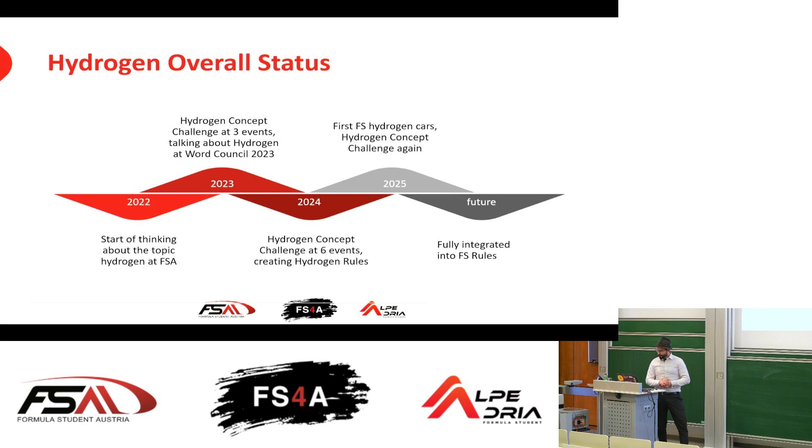Hydrogen is now the new cool stuff in Formula Student. It has been launched in 2022, and already in 2023 we had a Hydrogen Concept Challenge in 3 events, which has expanded to 6 events in 2024. And now for the 2025 season we're going to have, hopefully, the first actual hydrogen cars on track, and also there will be, again, a concept challenge.

Why are we going to do that? We want to propose alternative technologies because we think that, generally speaking, hydrogen will be an important topic in the future, not necessarily related to mobility. We don't think hydrogen will be the biggest issue in cars, but we think that promoting hydrogen to students and new engineers is a good idea for our future. We also want to give you the possibility to build green vehicles without having to deal with the high voltage system, because some teams and universities have trouble with that. So you can go zero emission without the need for high voltage batteries. And we want to encourage students to acquire knowledge in hydrogen.

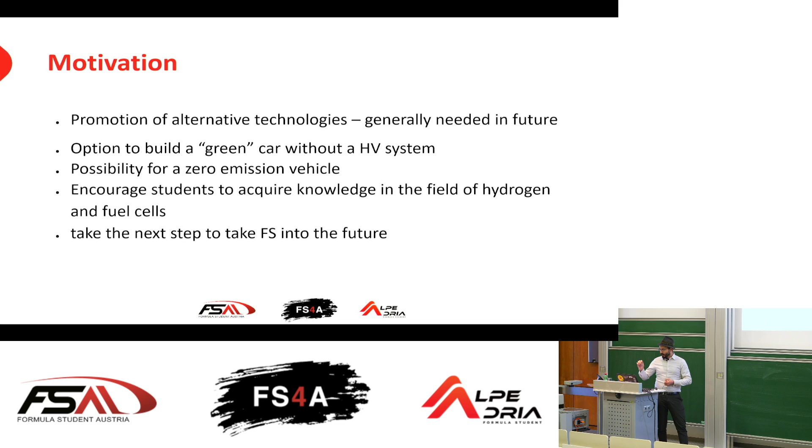We're not alone with this. There are other motorsport events which are dealing with hydrogen fuel cell and also hydrogen combustion prototypes. So we think this can generally be an exciting topic for the future of motorsports.

As I said, we will again have the Hydrogen Concept Challenge. So if right now you are not yet ready to make a switch to an actual hydrogen-powered vehicle, you can participate in a concept challenge. It will be basically a special award with prize money, at least for FS Austria. It will also be available at other events - you can see here at the bottom we have FS Austria, FS East, Croatia, Alpe-Adria, Portugal, France, and also the second event in Germany, Formula Future.

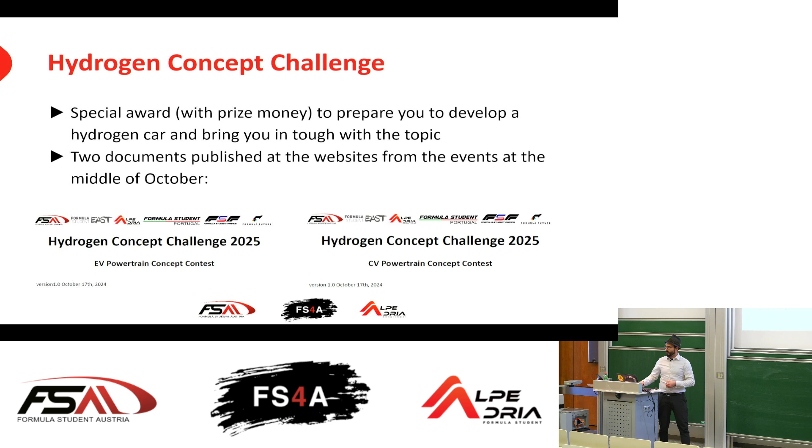So as I said, in 2024 there have already been 6 events which offer the concept challenge, and in the future it will at least be 6 events as well.

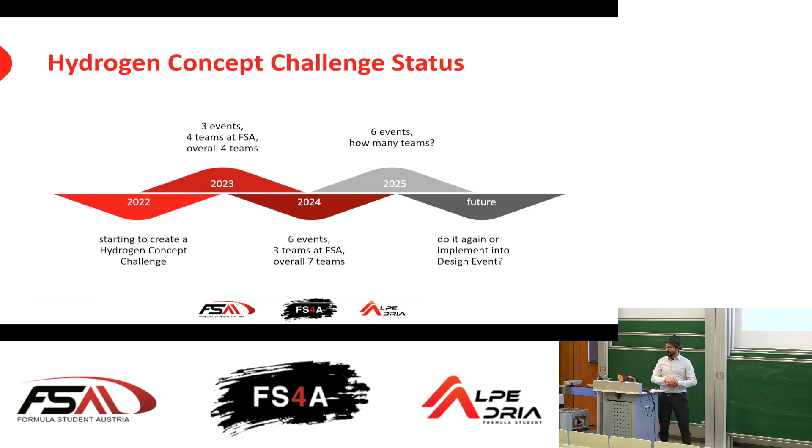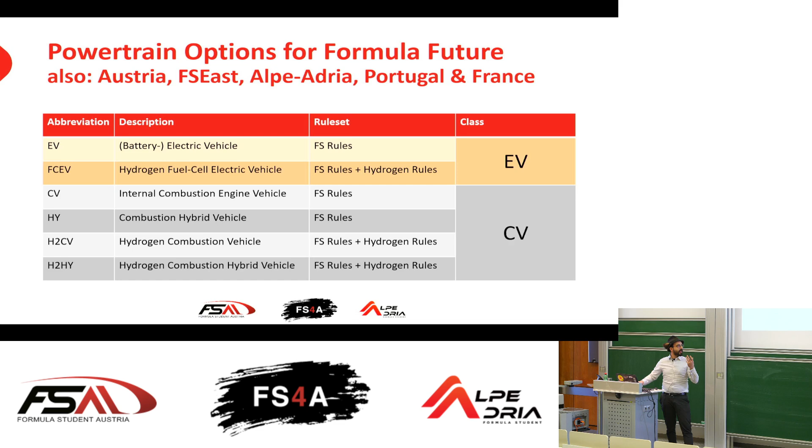What does this mean now for the rule set? We don't have 2 vehicle types anymore. We have now a total of 6 vehicle types, because if you count it together with all the possibilities of hybrids that we allow, you basically can have 2 different kinds of electric vehicle - one battery electric and one hydrogen fuel cell. And for combustion vehicles you have a total of 4 options: with traditional fuel, with traditional fuel and hybrid, and with hydrogen as a fuel with or without hybrid. Those 6 classes in total will be competing in the 2 standard classes that we know already. So the idea is to implement hydrogen as a new option within the existing classes.

I want to give a short overview of what is happening with hydrogen as a fuel. The title says it already: it's not more dangerous than petrol or batteries, it's just different. Hydrogen itself is not an explosive, because an explosive material has the oxygen within itself. Hydrogen doesn't have that, it just burns really, really well. It is the least dense gas there is, so it's 14 times lighter than air.

What that means is, if you're working or dealing with hydrogen outside, it's very low risk because any time there is a leak, it just goes straight into the air and dissipates very quickly. It also means it's almost impossible to light anything on fire in the outside air because it will be diluted very fast. If it catches fire, the flame is almost invisible, so that of course is a risk.

You may know that from methanol fires, which have the same issue. If you have like nitromethane, the dragster fuel, if that is on fire - if any driver has it on their driver's seat and he is on fire - it will look completely crazy because nobody sees the flame actually. That is a problem, but the jet of flame will go straight up into the air, and if you make sure your system is all behind the driver, the jet of flame just goes straight up, then the driver is not actually at risk.

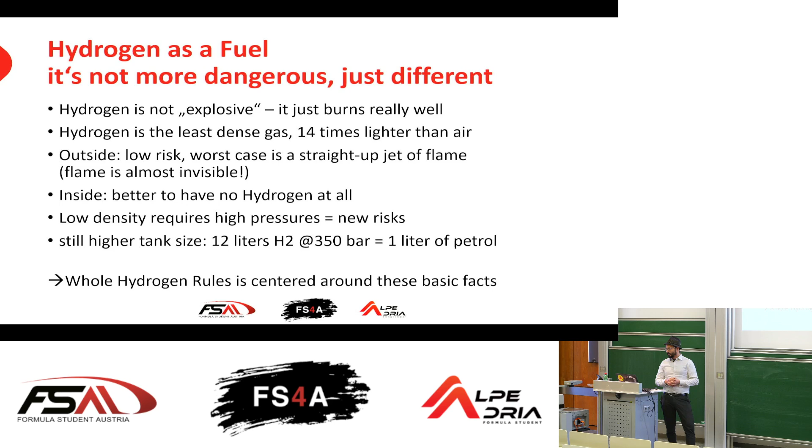Also, the low density of hydrogen requires high pressures. If you have about 12 liters of hydrogen at 350 bars, which has been set as the maximum pressure limit for Formula Student at this point, it is equivalent to about 1 liter of petrol. So you will need about 40 liters of pressure tank bottle for a combustion car, and it will be about the same size for a fuel cell electric vehicle. So that is a lot of extra volume in your car.

How does hydrogen work for combustion vehicles? The basic engine concept is the same, so you can basically fuel a petrol engine also with hydrogen. You can use port fuel injection. Direct injection is not really that suitable yet for hydrogen.

The biggest difference is that hydrogen burns really, really fast. If you're using the same lambda values as with petrol, so a stoichiometric value, then it burns 10 times faster than petrol. This would normally be called knocking in a petrol engine. So in order to deal with that, you have to dilute the hydrogen with lots of air. You need at least a lambda value of 2 or more to get it under control.

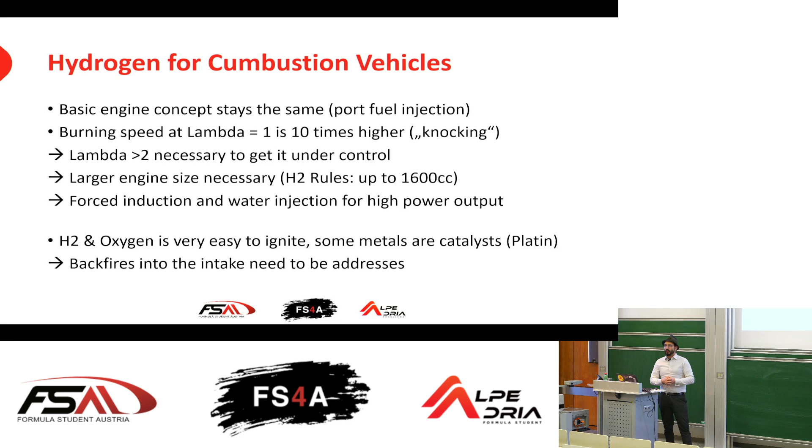In order to make it possible to have the same power, more or less, we are going to allow up to 1.6 liters or 1600 cc's of engine size. Most likely you will need forced induction coupled with water injection to get it under control, because it just burns differently. Also, hydrogen and oxygen are very easy to ignite, so the ignition system doesn't need a lot of energy anymore, but this also means it could ignite when it shouldn't really. So backfires into the intake system are really an issue and need to be addressed.

For hydrogen fuel cell electric vehicles, we are currently working with a limit of 2 kilograms of hydrogen, but this is going to be up for debate. We're going to have a whole different session just dedicated to hydrogen at the very end of this event. In order to compensate for the additional weight of the fuel cell, we are going to allow up to 100 kilowatts of tractive system power instead of the 80 kilowatts it is today. The only thing which we are stipulating is that at least 50% of the electric energy for the endurance has to come from the fuel cell.

So basically a small battery, and you can drive your acceleration, skid pad and also autocross event with that battery. Just for the endurance, we're actually forcing you to use the fuel cell. That is the current plan in order to get it started.

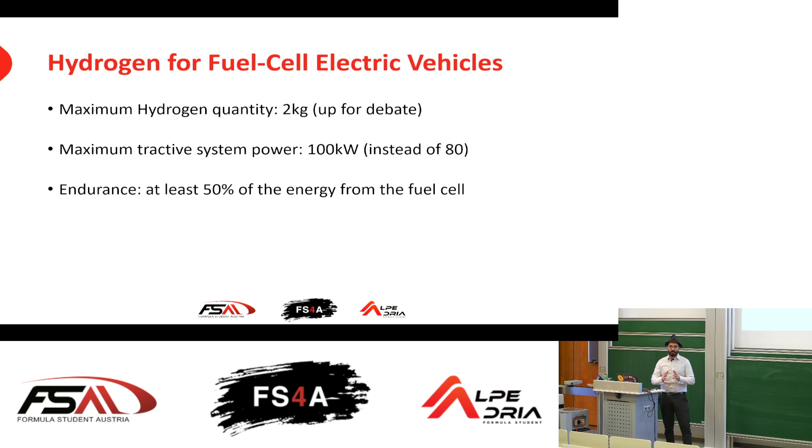And now at the end of the hydrogen safety part, similar to the requirements for electrical cars, so similar to the ESO requirement, we're going to have the hybrid safety officer. My colleague is just right now publishing the Slido note for that. So we are going to offer a course to participate and get trained as a hydrogen safety officer, sorry about that. So this is about hydrogen safety officer training.

We're going to have a training on the 22nd of February in Karlsruhe. It will be about 100 euros per person. And you can use the link now, which is in Slido, to show that you are interested in that, so that we can finalize the organization for it.

And now I would like to transition to the main course. So hydrogen is over for now, and I would like to get started with the rules. I'm one of the persons responsible for the FS rules. I'm personally responsible for the combustion vehicle chapter of it. And I'm also, of course, in close contact with anything regarding the technical specifications.

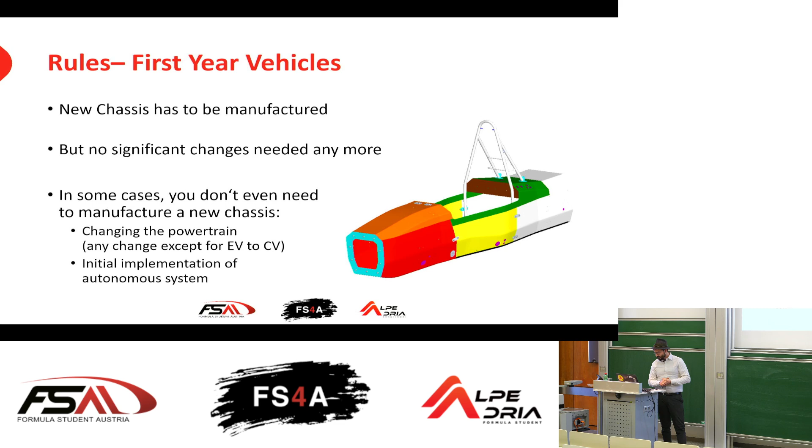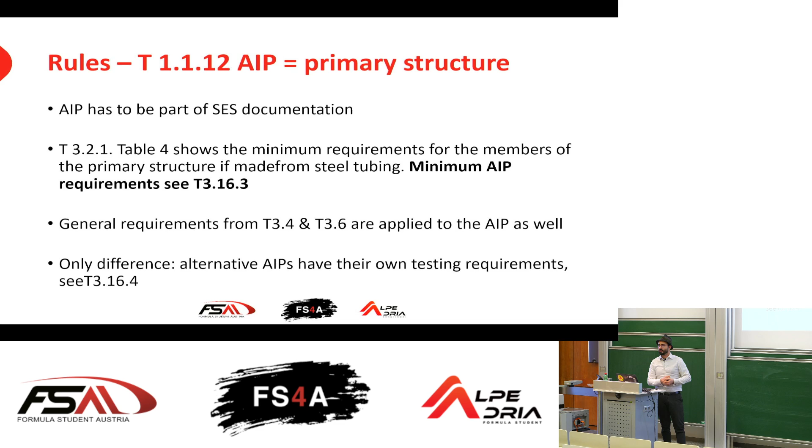It is also an exception for the implementation of the autonomous system. We have made a small tweak in the definition of what is the primary structure. The anti-intrusion plate, AIP, is now also part of the primary structure. It's basically a very small change. You still have to test your anti-intrusion plate according to the very specific rules now in T3.16. It's just to make clear that the other rules, 3.4 and 3.6, are going to be applied to the anti-intrusion plate as well, which according to the old rules technically was not the case. In reality, it already has been, so this rule change shouldn't really make a difference for you. It's just formality, to be honest.

Rule T2.1.1, good engineering practice. This is something I want to emphasize: it is not possible to write down everything in the rules. This is a very short rule - you have to design and manufacture your car according to good engineering practice. Yeah, okay, nice and all, but what does that mean?

It means you will not pass the technical inspection at FS Austria. For example, if your primary structure, your chassis, has very bad manufacturing quality, if everything starts delaminating, for example in the monocoque, we just won't let you through. If you have excessive flex or just a bad load path design in safety critical components like your suspension or your steering system, we consider this to be bad engineering practice, and it won't be allowed.

The typical example is that you have a steering system where the front wheels are being held in place, and you turn the steering wheel and you can flex it this much and nothing happens at the wheels. This is just a bad engineering design. Similar problems can occur with the brake pedal or just generally with anything related to safety.

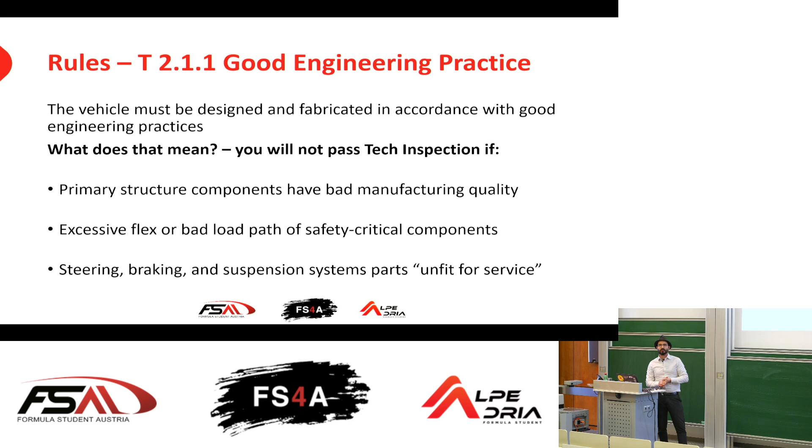A new rule change made as a consequence of issues seen this year is rule T2.6.4. This is one of the rules currently being updated with the FS rules version 1.1 update, which should be published in a few days, hopefully. The new updated version of this rule will say you need to have a 5mm minimum clearance in the radial direction between the rim and any other static part in your suspension - typically this is your upright and your brake caliper. The reason we are forced to make this rule is that many teams don't have enough clearance, and when the car is moving, the whole assembly will flex, leading to problems like seen here.

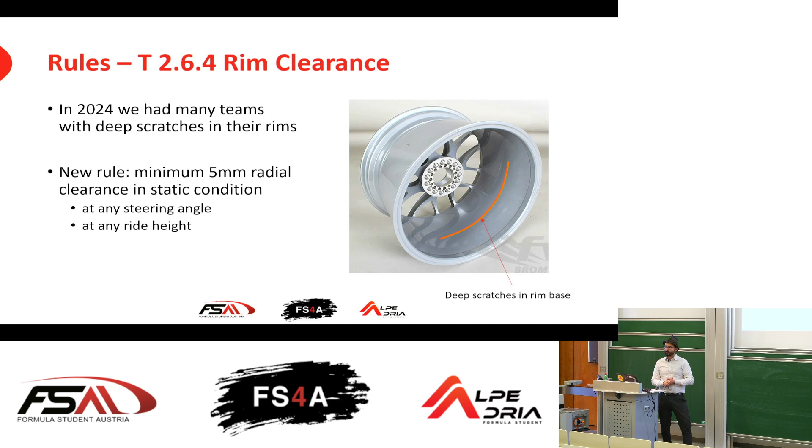This is actually a carbon fiber rim. You can see here on the right, it flexed excessively and touched the brake caliper until it was so thin that the rim actually broke, as you can see here on the left. But it's not limited to carbon fiber rims - we have definitely seen a lot of aluminium rims as well, which had very deep scratches, and we had to confiscate those rims. They were not allowed to participate with these rims anymore.

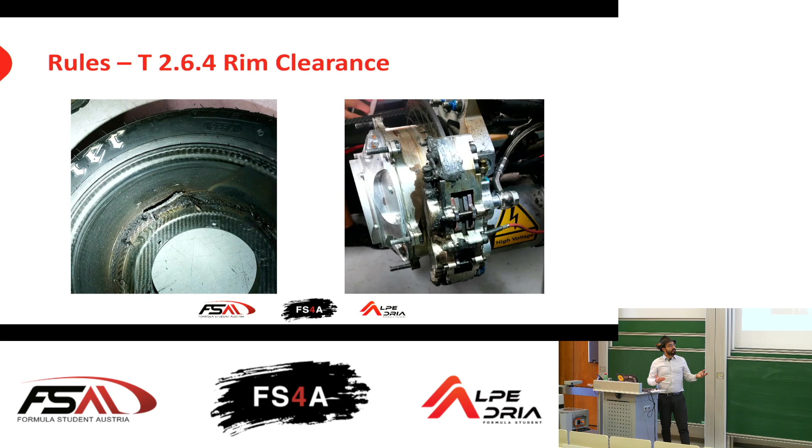But of course, this is one of the things which we understand to be bad engineering practice if you do not have enough clearance, and this is just one very specific example where now there is a rule for it. There are thousands of other examples where we consider it to be bad engineering practice, but we cannot put it all into the rules specifically. So this is why we have an overall rule to ban bad engineering practice. I hope you understand.

General new rules with regards to the chassis. Just reiterating, most of this has already been covered by my colleagues from Germany as well. If you have steel with a low yield strength below 305 megapascals, you might need to increase the wall thickness of your tubes in the future because of the way it is now calculated in the SES. There are also now extended requirements with regards to the SE3D file.

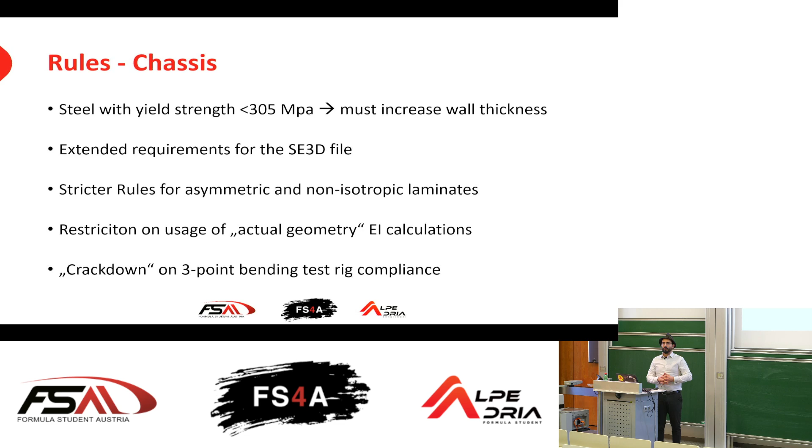There have been clarifications and stricter requirements with regards to asymmetric layups - asymmetric layup means one skin is much thicker than the other one - and with regards to non-isotropic laminates, which means you have laminates where there is not a same amount of, like, 0, 90, plus, minus 45 degree fibers in the laminate. There are also further restrictions with regards to how you can calculate the stiffness in your SES, and there is a crackdown on the 3-point bending test rig compliance within the SES. But this has already been communicated over the last 5 years. Five years ago we started communicating to the teams, hey, your design is bad, you shouldn't use it like that, we might change it in the future - and now is finally the future.

One of the rule changes, which is also just a formality, is we have removed the rules with regards to mechanically joining a bracing. Just to make sure these designs are still allowed, we removed it from the rules to save space. There is still a general rule, 3.15.1, which says any attachment point between two chassis members needs to be strong enough to carry 30 kilonewtons in any direction. These designs generally can do that, so they are still allowed, you just have to show it according to the general rule.

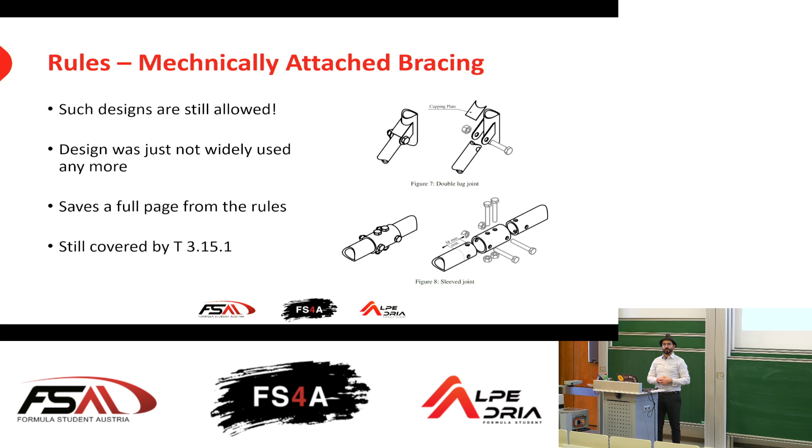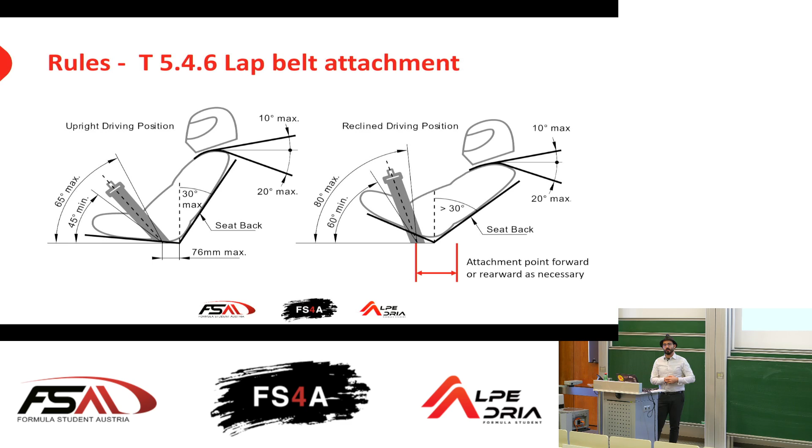There has been a misunderstanding with regards to lap belt attachments. Thank you to Theo Bratz for pointing that out. If you have a reclined driving position like seen on the right, in most cases it will not work if your attachment point to the chassis is forward, like shown in the picture. You might need an attachment point rearwards of the seat base to seat back junction point, to make sure your harness has the correct angles according to that graphic, and that your lap belt is at the right point of the hip bones, which is also a requirement in the rules. This is currently being cleaned up for the 1.1 version of the FS rules.

Some more miscellaneous parts: there has now been made an exception for blind inserts, which many teams use to attach their rear plate and fix their accumulators to the car. This is currently being finalized for the 1.1 version.

We have now specifically allowed any type of snap ring design for brake disc floaters. In the past we said you could use it, but only a design which was off the shelf, and now it is clear you can use any kind of brake disc floaters with snap rings.

A very small change in T.13, I just want to explain it. This rule means you have to be able to safely lift and jack your car with the 4 team members who have the dynamic vest. So if you need 4 members to lift the car, and a 5th person to put a jack underneath, plus your scrutineer helping, then you're out of luck, you're not rules compliant. Me personally, I don't mind, but FS Germany is very strict about that. They don't want to help you check the car because they don't want to be liable for anything. So 4 persons have to be able to check out the car.

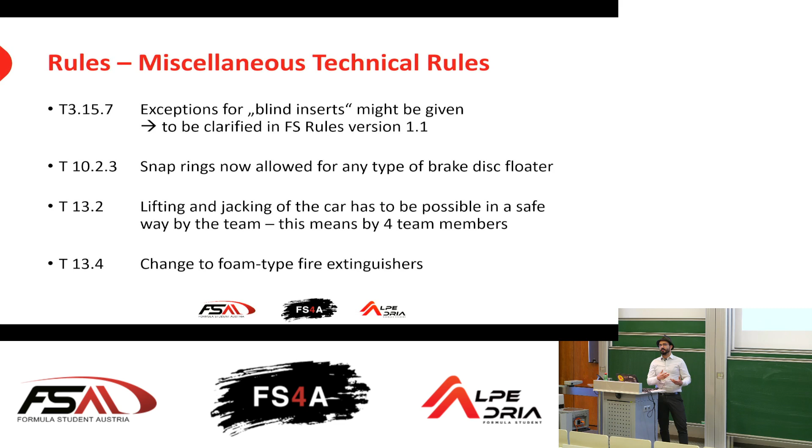One of the biggest rule changes for 2025 is the complete ban of ground effect devices. In the FS rules, there is a 500 watt limit. Why is it like this? Previously, the rules specifically said active aerodynamic devices are not allowed. Then came along clever teams who put their radiators in the underground area and used completely oversized fans, saying it's not an active aerodynamic device, it's just a cooling fan. So we had to let it through. Then, because we didn't want to argue with teams anymore, we said let's see what happens if we just remove the ban on active aero. This was the situation for 2 or 3 years in the past.

And let's see what happens. What happened was that some teams, I'm not naming names, built active power ground effect devices which were very strong, had large low voltage batteries which posed a problem on their own, and most notably they have been very, very loud.

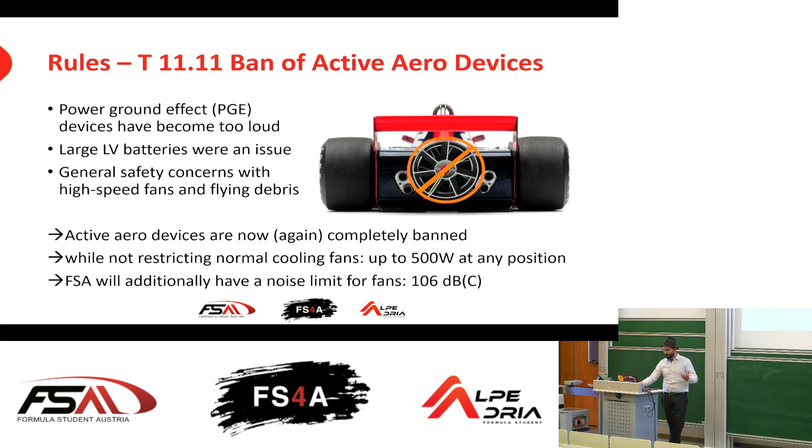Also, to be very sure, you have to be able to prove that your system and your fans or whatever you're using to move air is limited to 500 watts. If you don't have an off-the-shelf component with a data sheet, but some kind of fancy self-made design, then this might lengthen your scrutineering, your technical inspection, up to an indefinite period. In the end, it might be easier to just remove it or put an off-the-shelf cooling fan instead. So just be warned, fancy shit technically gets banned.

Some small changes in the combustion vehicle chapter. We now have the air intake system. You have two options basically: as before, you can attach it rigidly to your engine and make soft rubber bushings to your chassis.

Or you can do the other thing as well, which until now was banned. You can make a soft connection with a rubber hose or silicone hose to your engine and attach the air intake system rigidly to your chassis.

There have been some small clarifications regarding hybrid energy storage - how this has to be mounted and how many holes for cooling and your harness you are allowed to put in your hybrid battery.

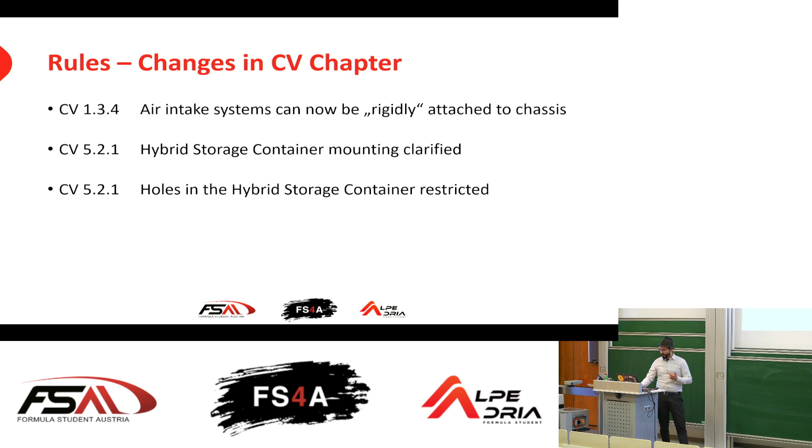I want to pivot now from the rules to some general tips from the mechanical side - best practices, how to design a car. It has to be clear, in order to win a race, you just first have to finish it. So you should focus on small issues of a car where you can improve your performance, and you shouldn't change everything just because you can. This might or might not be directed at the people in front of me.

You should really get your car running at least 2 months before the competition, not only because testing is very important, but also because there is a vehicle status video deadline. In order to participate at the event, you have to upload a vehicle status video which shows your car running. This is a very strict deadline. If you're not able to show this video, you will just be dropped from the list. You have already paid your participation fee, and typically you don't get that returned.

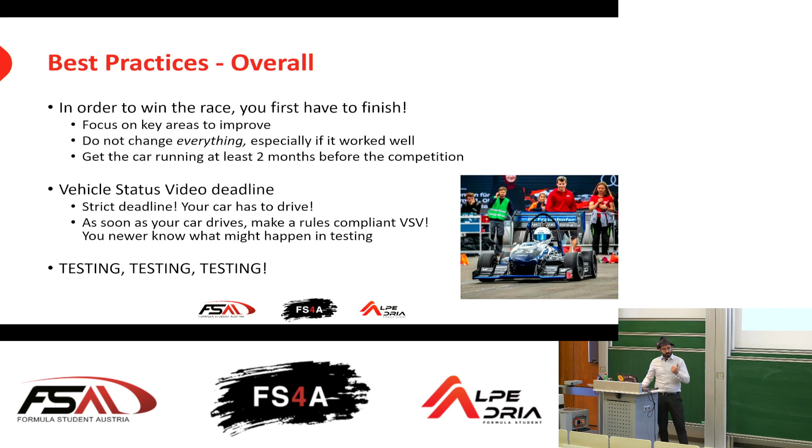As soon as your car drives, doesn't matter if it has wings or not, it just needs basically the most critical driver safety systems, like the impact attenuator - you can find the list. As soon as it drives, just make the video. It doesn't matter if the car is pretty or not, it just needs to drive. And as soon as you're able to, test the car, and test the car again. This is what brings you most of the points in dynamics.

With regards to your design process, I would really encourage you to use the SES template as soon as possible in your design process. Last year's template will work fine for now, because generally speaking, it won't change from year to year that much.

Also, I want to make it clear again, the FS Germany rules question tool is not intended for general design questions - not for 'hey, I have this design, is it good or not?'. This tool is meant for a specific rule: I don't understand it, what does it mean, A or B? And off the record, I know many of your questions are not being answered in short order currently, so if you want another option to ask a question, you can also contact us.

Either directly, if you have very specific design-related questions, you can find our contacts on the FS Austria website, or if you need an actual official rule inquiry, you can contact rules@fsaustria.at.

Also some tips to make your life easier. If you use steel in your chassis, use normal steel, which is not according to the alloyed steel requirements, and make sure that it has a yield strength above 305 megapascals, because otherwise you just have to deal with additional requirements and it's easier not to.

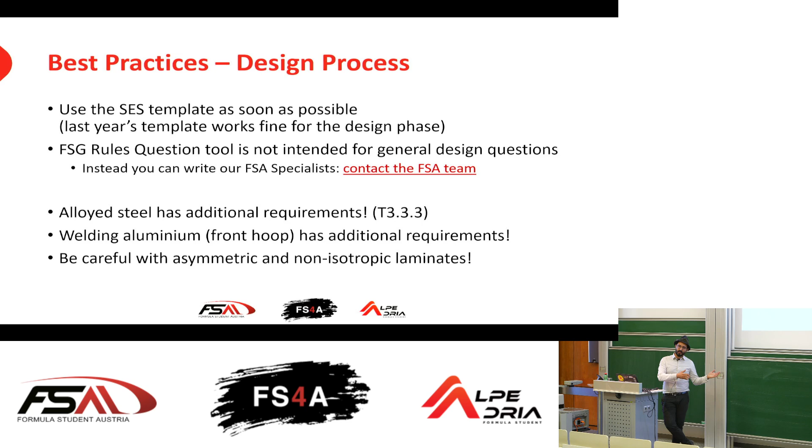If you're welding aluminium, like in your front hoop, you will also have additional requirements. It's easier not to. And also, again, if you're using laminates which are asymmetric or non-isotropic, you also have to deal with additional requirements. It's easier to have symmetrical and quasi-isotropic laminates. It's easier to do.

Some tips with regards to your suspension system, so your brakes and your wheels. Please keep it conservative. I'm circling back now to the good engineering practice rule. A flying wheel or a disintegrating brake disc is not a good recipe for winning a race. It might save a few grams, but that doesn't really contribute to driving through the endurance.

You have to consider that the parts which are rotating at your car are typically under very high load cycle requirements. So every time the car is doing one rotation at the wheel, this is one load cycle. This can add up quickly and it can lead to fatigue strength issues, which is typically not really a problem for race cars doing like 100 kilometers.

Also, make sure your brake pedal, and also the part of the brake pedal which is used to apply the force from the shoe, has to be metal. So the direct surface has to be metal, but left and right of it, just as a guide for your heels or your shoe, this can also be any other material. And also, just as a regular joke, it's called the brake pedal, not the break pedal, so it shouldn't break.

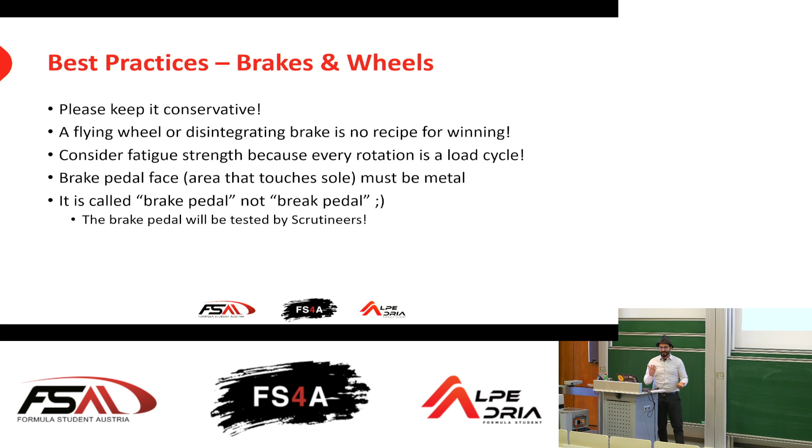Also, I want to make sure again, there is a fire-resistant requirement for firewalls and also accumulators. You can test this yourself, you are allowed to do it. So if you have some kind of very special laminate which consists of 3 different materials, you will need to test it yourself because data sheets won't give all the information you need. So you just make test specimens according to the regulations.

You take a Bunsen burner, you make a video of it, you put a clock in the background of the video to make sure, of course, that you didn't speed up the video, and then you bring the video and all the test samples to the technical inspection for reference. That typically is not really a big deal, and you can use a big variety of designs for your firewalls or your accumulators.

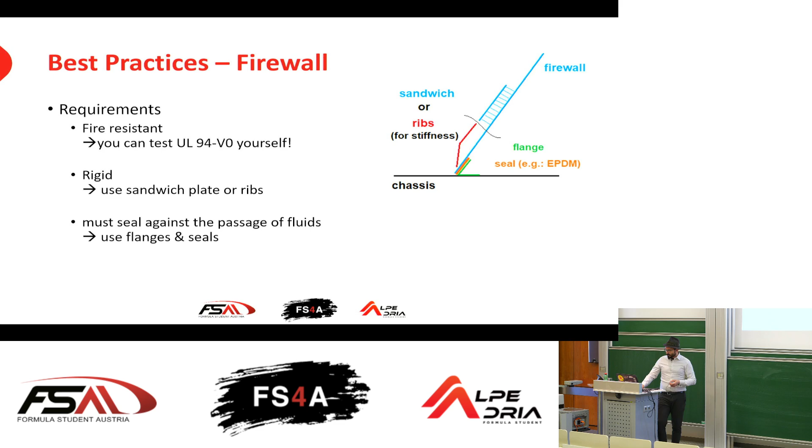Also again, cooling systems, we do not want to restrict you with regards to your cooling fans. If you say you need more than 500 watts for cooling fans, we can talk about it. Give us feedback on it. We want your cars to be cool, to make it through the endurance. We know that there are typically very hot racing conditions at FS Austria and also, of course, in FS Alpe Adria. So make sure your cooling system is big enough, and if you have problems with the 500 watt fan limit, let us know.

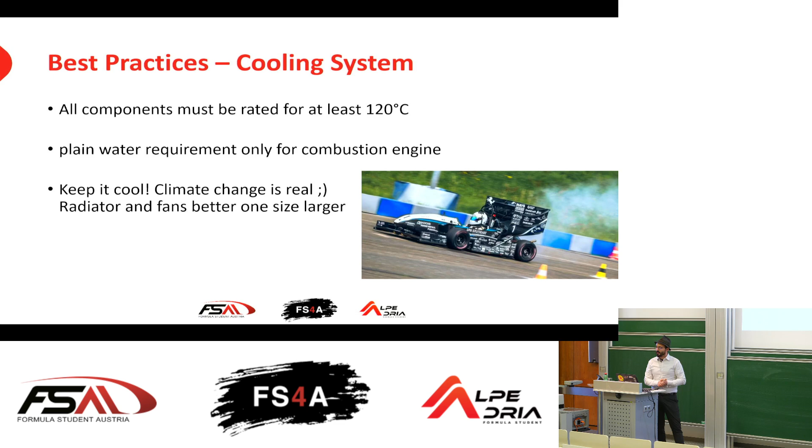This is now my penultimate slide, and then I will go to the questions asked us. Just some more tips for mechanical inspection. We do not want to get on your nerves. We want to make sure that our competition is safe, and we want to have as many cars as possible on track. Especially at FS Austria, we try to keep the technical inspection open for as long as necessary to get everybody through. And of course, we also have to keep it fair for everybody.

So if one team has some kind of very specific design which might be an advantage, but they cannot change it, then typically speaking, we will offer them to receive penalty points, which levels the playing field, so to speak, but they can still drive. That is our way of doing it.

You can prepare for the mechanical inspection by using the inspection sheet. You can find last year's example on the homepage.

Also to make clear, the technical inspection is necessary for you to participate in the dynamic events. So you might not get points directly from scrutineering, but without scrutineering, you don't get any points in dynamics. So you should treat it as important as it is.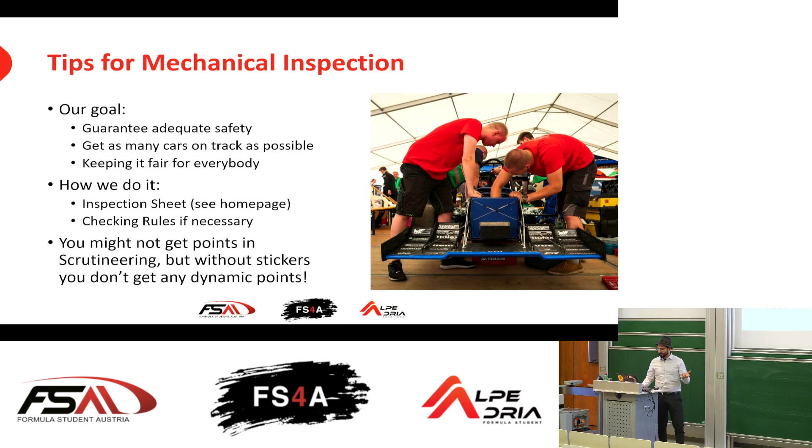How can you prepare? As I said, you can ask rules questions. If in doubt with your design, you should keep it conservative. Ask yourselves, does it look right? If it doesn't look right, it is a good idea to change it. You can make a dry run technical inspection with the inspection sheets which are online.

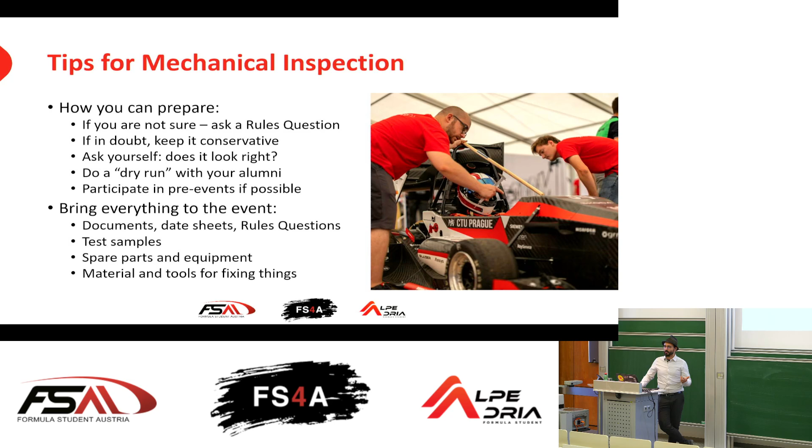And if possible for you, you can participate in pre-events. At the event itself, it is best to be prepared, so bring your documents, your data sheets, bring your test samples. It's also a good idea to not get on the nerves of the scrutineer, because at the end, you will not have any benefit if you spend like 3 hours arguing with the scrutineer — it will only delay your dynamic events.

One of the first questions is, the technical inspections are very different between the events — why is that? Well, because different events have different officials which are actually organizing the event. We try, of course, to keep it consistent throughout Europe. We have more or less the same inspection sheet, we have the same rules, but every event still has the possibility to make their own version of the technical inspection. That's just part of the deal. But I can assure you, for FS Austria, we try to keep it very consistent throughout all 58 teams that we have here.

Typically speaking, there are a lot of designs which are compliant with the rules but made yourself. Especially in your suspension system, you might be forced to have a special design — you have a shaft, put a thread on it yourself, and then put your own hole in it for a locking wire or a cotter pin. That is completely fine. If you have a very specific design and you're not sure, it might be best to actually ask a rules question with your actual design in mind.